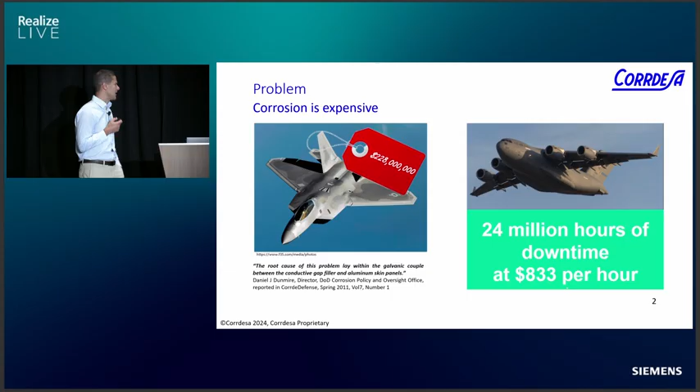Corrosion is definitely complex. It's really, really complex because we have so many different mechanisms here. We have galvanic corrosion, of course. We have pitting corrosion, we have crevice, we have so many different mechanisms. And the reason for the complexity is not only the different mechanisms, but also the different things that are actually taking place while we have corrosion.

But just because of the complexity of the problem, we should not stay away from modeling, because there are other areas like turbulence, for example, combustion, chemical reaction, that are as complex as corrosion, but we are seeing that folks are making really good progress in those areas. But we at Corrdesa still see that corrosion is in the Stone Age.

So we have really fast computers, we have really efficient numerical methods, but still we don't see the community embracing CFD applications, or not even CFD, applications that we have developed to mitigate corrosion risk. And more importantly, 80% of all these problems are related to galvanic corrosion. So if we focus on that 80%, we're going to make a really, really positive impact in the industry. Not only in the industry, but of course in other areas as well.

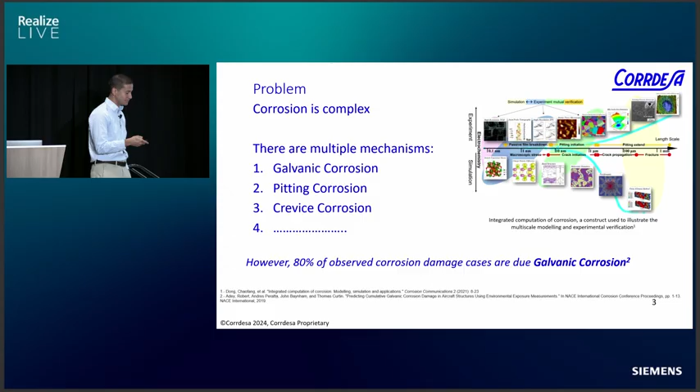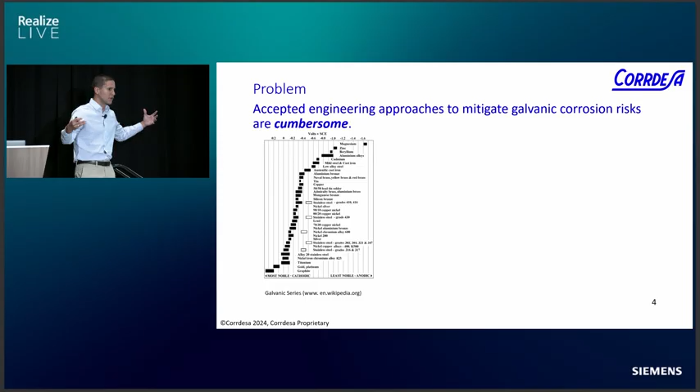So, just to make the example here, these two materials will definitely show lower corrosion than, for example, zinc and copper over here, because they are really far apart from each other. But you can really see that this becomes really complicated once you start working with complex systems, with multiple materials, multiple pairs, and all of that.

The MIL standard is what the DoD is now using. They said now it is time for us to use a standard so that everybody, OEMs, can use a common ground. And this is really simple to use. A table, as we see here, we have this column over here with some materials, and another column here that actually represents the same materials. So for example, 11 is 11 over here.

So if we want to determine the corrosion rate between steel and this stainless steel over here, it is basically just about drawing a line from 11 and intercepting that with 30. And that basically says that the corrosion risk is number 3, and that says that we are going to have a corrosion rate between 1 and 5 mils per year.

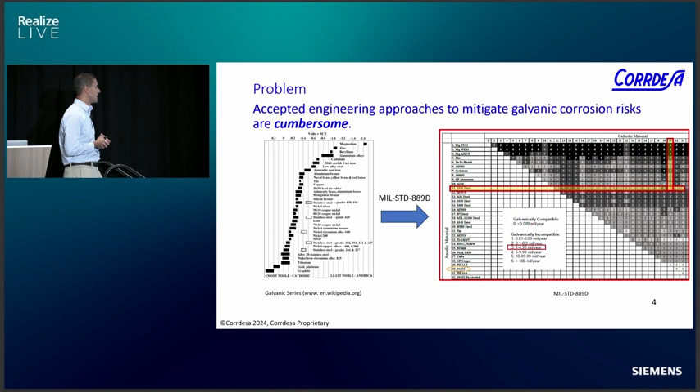This is a method that is now used in the DoD, the Department of Defense is using that, but it has a main limitation. And the limitation is that we have to use this with 1-to-1 anode cathode ratio. Once we change the anode cathode ratio, this doesn't work anymore. We cannot use that anymore. And it's clear that actual systems don't have that 1-to-1 anode cathode ratio.

Another issue is that, imagine now you have multiple materials, and now you have to start keeping track of the combination or the interaction of this material with the one at the bottom, the fastener with this one, the fastener with the other one. And you can quickly see that that becomes really, really complicated, really cumbersome.

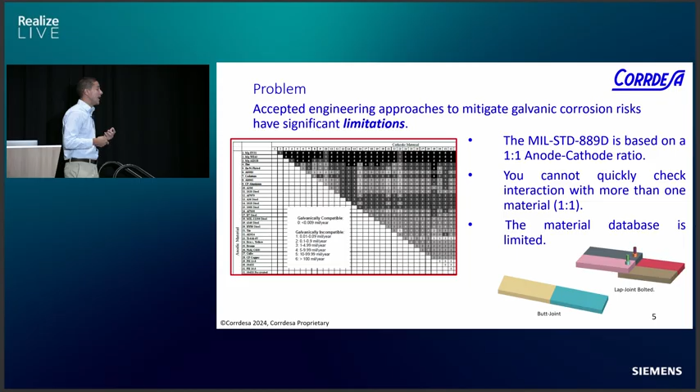And of course, the material database is limited. And most of the time, companies like Northrop Grumman, General Dynamics, you name it, Lockheed Martin, they develop their own recipes, their own material, and they want to know what is the electrochemical signal of their material so that they can understand their system better.

Because of that, at Corrdesa we developed, I think it was 7 years ago, our product called Corrosion Djinn. And Corrosion Djinn is not only a software that provides you information about the corrosion rate, it is also a database management system, which means that Lockheed Martin can say, hey, I need you to add this material that I created for this system in my database. Okay, perfect. Give us the material, we run the test, and we're going to update the database for you.

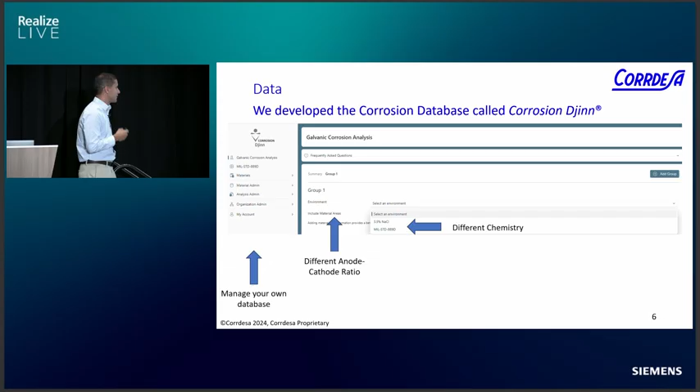Another important feature that we have in this version of Corrosion Djinn is that now we can work with different anode cathode ratio, which is extremely important. You will see that shortly. And now we are working on another feature that considers the different film thickness, so we can see the role that the thickness plays in the corrosion rate. Thinner thickness, of course, increases the corrosion rate, and thicker film thickness basically reduces the corrosion rate. And also we have different chemistries here. We have, of course, the one from MIL standard and the 3.5% sodium chloride.

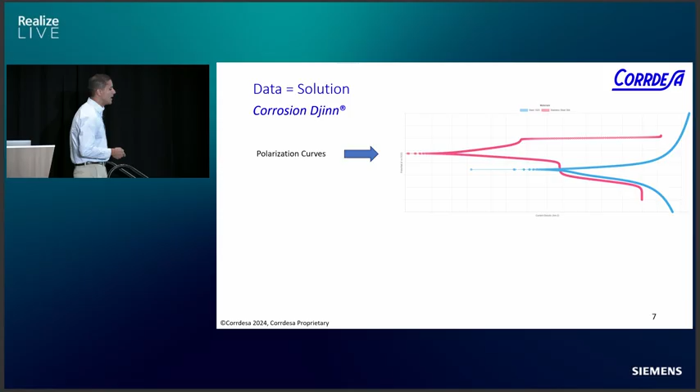So from Corrosion Djinn, once we run this, which takes a few seconds, it's actually really fast, we have information that is important for our electrochemical team. We have OCP, we have self-corrosion rate, we have all that information. But more importantly, we see that we get the same MIL standard rating. In this case, it's number 3, and if I quickly go back, you can see that that was exactly the same number we have here. We use the same procedure in the back end called mixed potential.

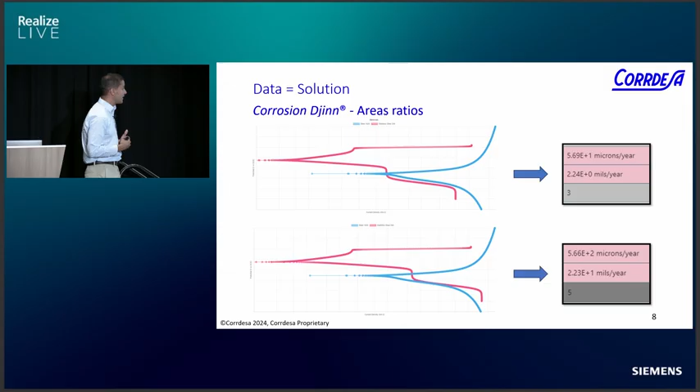In this slide, we see the role of the anode cathode ratio. Anode cathode ratio 1, again, 3, and we have somewhere around 2.2 mils per year. And by increasing the anode cathode ratio, we now have 5. This is not captured by the MIL standard. Even though we use the same mixed potential, the same physics in the back end, the standard doesn't capture that, whereas Corrosion Djinn does.

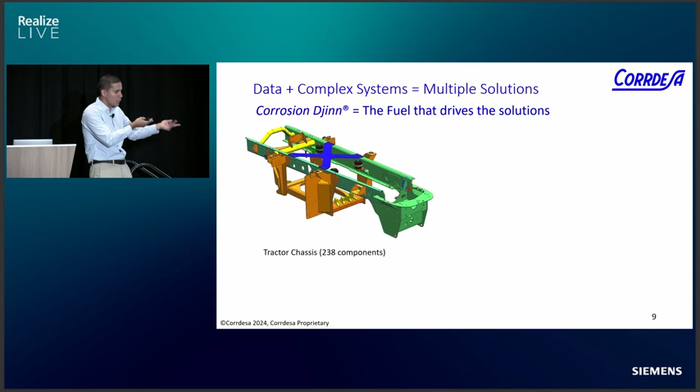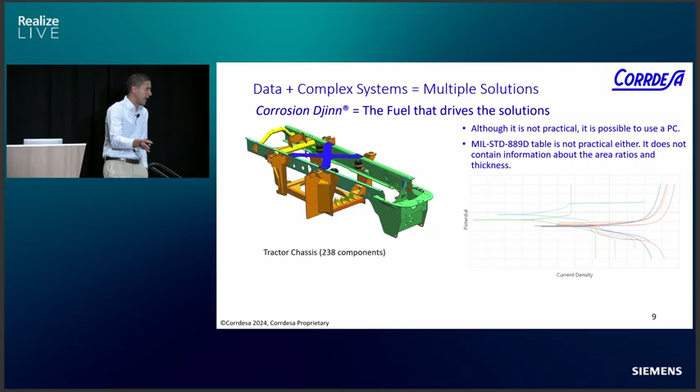The question is, how can we use that for real systems? Because for one-to-one anode cathode ratio, or even for different anode cathode ratio, we have a solution. But for real systems, it is evident that using polarization curves is way too complicated, because now we have to see the interaction between this curve and all of them. And this is actually what we used to do in the past. Using the MIL standard is pretty much impossible, because I just demonstrated that the anode cathode ratio is important.

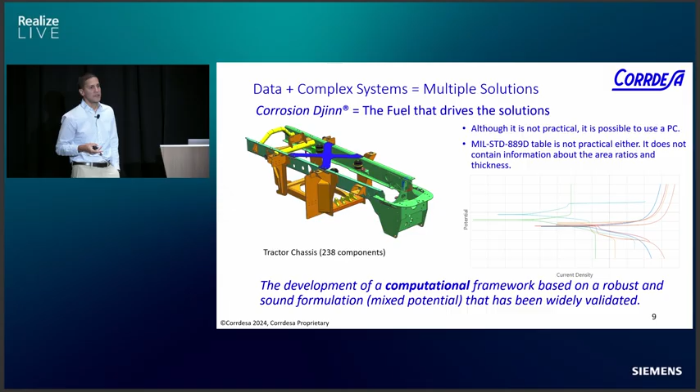That's the reason why we focused on the development of computational frameworks based on a robust and sound formulation, which is the mixed potential, that has been widely validated. And that's really important. Our database has been widely validated, and it's exactly the same procedure that the MIL standard uses.

That is why we said, okay, if we understand that data is important, no matter where we use it, how can we leverage that in different stages of the engineering process, starting from the far left all the way to the far right? Remember, now this is mandatory, MIL standard. And what is even more important, this standard over here, the 1568, says that modeling and tests shall be used. And that is important because if other areas of engineering are using modeling for certification, like FAA is actually considering CFD for certification, why is the corrosion space still using tables and Excel sheets? That doesn't really make sense.

That's the reason why we said, okay, let's just make our very best to use the data that is accurate to resolve complex systems, and let's just create multiple solutions. Because we don't believe that one size fits all. We don't believe in that. Again, at early stage of the project, we can use it for conceptualization tasks, for example. We can definitely use Corrosion Djinn, no problem. Well, we know we are going to have this component, it has this material, we have this anode cathode area ratio. Okay, corrosion rate will be somewhere around here. That's perfectly fine. We can work with that.

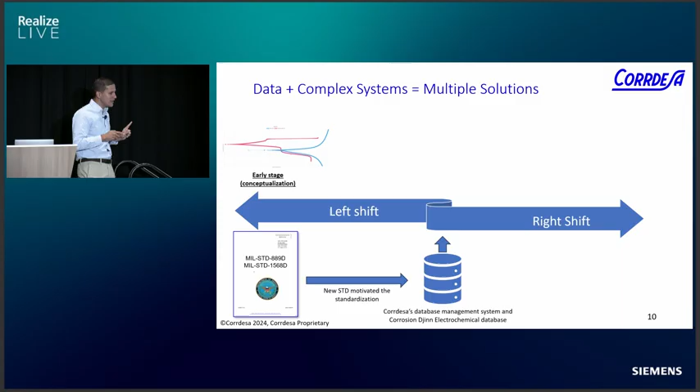It will definitely help to avoid problems that we see in the C-17 and, I think that was the F-35. I usually confuse the F-22 with the F-35. But it's clear that now we have a tool that we can use. Okay, but systems are complex. Well, no problem, we got you. Siemens and Corrdesa, we joined efforts together and we pushed our database into NX. Now that solution is integrated in NX. And you will see shortly how a simple click will basically interrogate the entire CAD, and it will tell you, hey, watch out, you're going to have an issue here. Hey, you are good here, go ahead.

And this is important because what usually happens is we can start resolving galvanic issues here. Remember, 80% of the problems are galvanic corrosion. So if we can start resolving problems once the engineering team has defined different sections or has locked in a few aspects of the design, we can actually bring all these here, and we're going to help the engineering project in a really positive way.

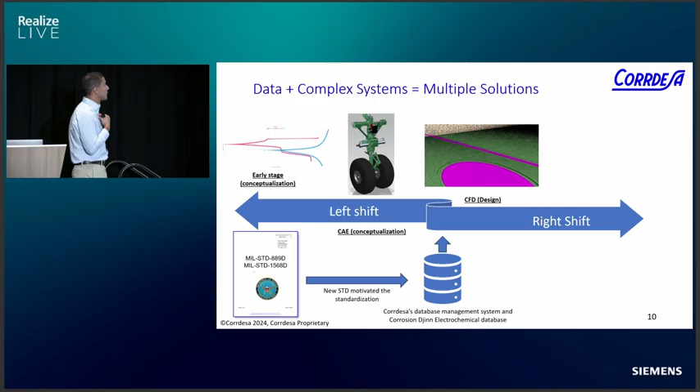The other way, the one I enjoy the most, is CFD, because I'm a CFD guy. Here I want to quickly mention a few important aspects of the CFD workflow. Most of the time, when we think about CFD, we think about turbulence and combustion and multi-phase flows, all of that. And one thing that I particularly like about the solution is that the equation we are solving is the Laplacian of the potential field, which has an analytical solution. So we don't solve the flow, we don't use either SIMPLE or PISO or any of these algorithms. We just solve the Laplacian of the potential field, which means that even though the mesh seems really fine, because we had to refine the mesh for multiple reasons, it's really fast. You can run these problems really, really fast.

And on top of that, remember, garbage in, garbage out. Well, assuming that we reduce the numerical errors because of the mesh, the procedure, the solver, all of that, if I use a boundary condition that is exact by nature, it means that at least my solution will be exact, assuming that my numerical error is really low. And that's something that we believe we are providing to our customers, because we're using this boundary condition in my CFD. And theoretically speaking, this has an exact analytical solution. Anyway, coming back to this.

Sustainment. Once we do our very best resolving all the problems here, and even over here, we still have folks that are dealing with things that were designed and developed 50, 60 years ago, and they need to resolve their problems. And we cannot say, oh, you know what, we can't, because we just focus on the design. No, we can. And actually, we do. One of our main customers is the Air Force, and, again thanks to Siemens and our partnership, we developed something that we call the Corrosion Toolset that you are going to see in a minute.

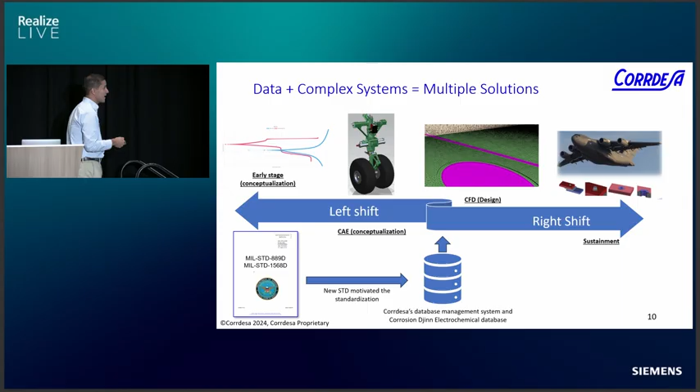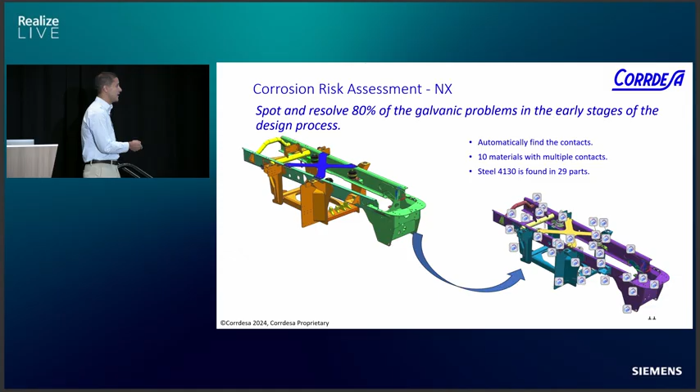So in summary, we use the same data for all these different types of solutions. Of course, this takes seconds, minutes, days and weeks, as you will see. This is a quick demo I'm going to share with you next. Again, we see the same section here. Now, after bringing that into NX, the mindset here is, let's just focus on those complex sections. Let me just define those areas where we have high corrosion risk, and let's try to resolve them in NX. Here we have, for example, 29 parts with 4130. So imagine doing this with the table or the polarization curve. That would be too much work. Look here, so this is NX.

I'm pretty sure you all are familiar with this. Now the feature is actually in the production version of NX. I brought the part. I will select the whole thing because I want to check my corrosion risk, 238. Click. It's actually going through all the body pairs. We have all my body pairs here.

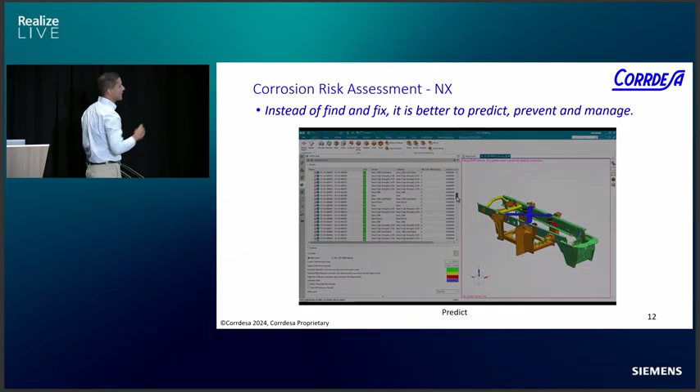But remember, we have to go to the face pairs because one body can have multiple face pairs or interact with multiple materials. That's what I'm doing here. And I have my galvanic corrosion. And now I see what is green, then yellow and red. As simple as that. We basically reduce weeks or days of work to seconds. And of course, I cut a few sections of the video, but that didn't take more than a minute.

So the idea here is, let's be proactive. It is not enough to say, oh, we have corrosion, to predict. No, we have to predict, mitigate, prevent, of course, and manage. Now let's solve the problem. Let me, for example, solve that section over here where we see that we have a corrosion rate somewhere around 230. That's aluminum 6013. And I'm changing that to aluminum 2024 because I have to be consistent.

Yeah, I had aluminum at the beginning. Let me just change that aluminum for a different series. In this case, it's 2024. And what you're going to see is that now I resolve my issue. The corrosion risk was 4, now it's 2. We solved the problem.

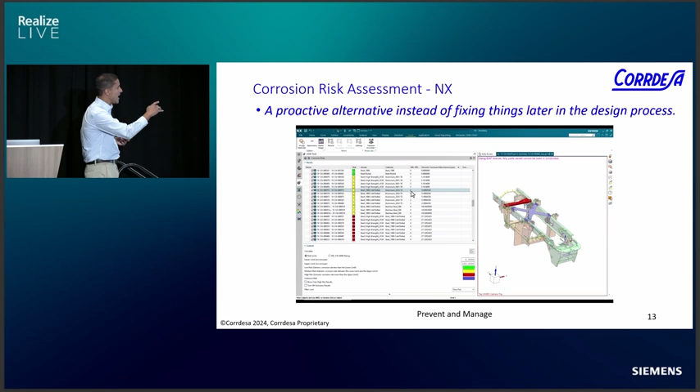So what if we use this way early in the process and we leave those really complicated parts or those complicated subsystems to the experts? Because definitely this doesn't mean that we are not going to have issues with corrosion. This means that we can solve a lot of the problems that are difficult to track once you have this complex system. Remember, we have teams of people working on multiple different areas, and most of these issues are actually picked up really late in the process, and at the end it's just too late.

You have to work with coatings and all of that. So the idea is, okay, let's start with good material selections from the get-go. Now you're going to see how CFD complements the tool set here. Again, so we have this component. Initially, we just analyzed the interaction between this piece over here and this piece over here. This is cold rolled, and this is aluminum, or it was aluminum 6013.

Again, this is the corrosion rate we had at the beginning, 230. And as the previous video showed, we reduced that from 4 to 2. Good. My boss is happy, everybody's happy. However, we quickly see that this part actually interacts with this one over here, with another one over here, and another bracket over here. So this system has 4 different parts.

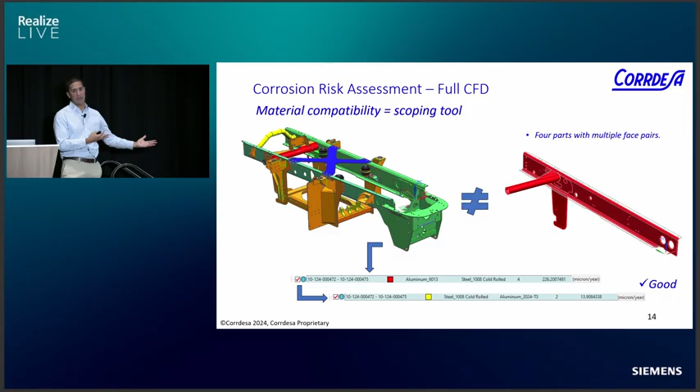If I do the same analysis of this component in CFD, we're going to see a totally different story here. Remember, NX is just, again, 1-to-1, but it considers different anode-cathode ratios. But still, it doesn't take into consideration the gradients that we have here due to the different electrochemical signals. And gradients are important. Look what happened. The story is totally different.

Now, after running my CFD, the same boundary conditions, the same conditions for the electrolyte thickness and all of that, I didn't change anything, we see that for the aluminum 6013, the corrosion rate is actually 2,000 microns per year, whereas NX told me, hey, it's 230. That's perfectly fine. We know that the scopes of these two technologies are different. And also, I'm seeing a corrosion rate on the 4130 over here, which NX, of course, tells me the same thing. We're using the same data.

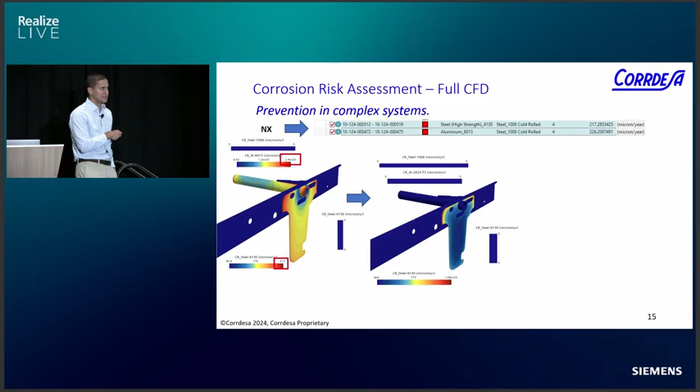Okay, let's just resolve this problem. Because I know that NX doesn't have the capability to analyze these multiple different materials. It doesn't. Okay, let me repeat the same procedure I did in the second video with CFD. I change from 6013 to 2024, boom, no corrosion rate. And that's even better, because it was 2, now I see that my corrosion risk is pretty much 0. Perfect. But now I have another problem.

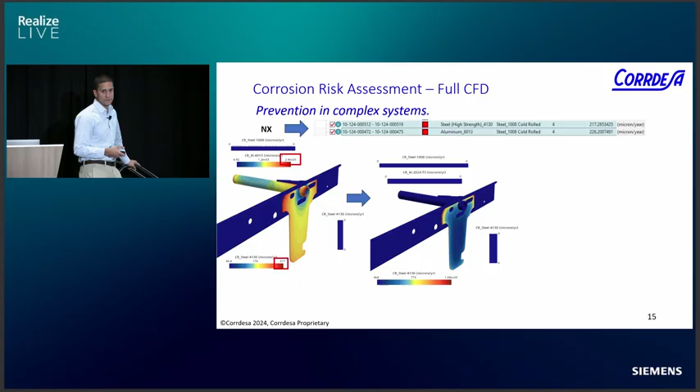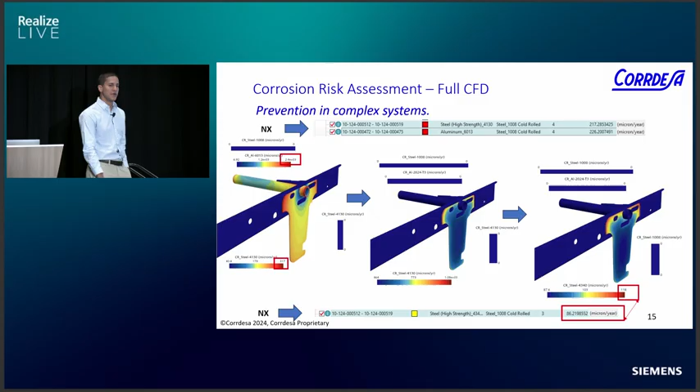This was 200 microns per year, and now it increased to 1,000. That's perfectly fine because I changed the system. Now my system converged to a totally different equilibrium point. But that doesn't mean I cannot resolve that. Of course I can. And that's what we do here. Now that I have the information of my entire system, let me just see what happens if I change the material of this component over here.

It was 4130, and I have to be consistent because I don't want somebody from the mechanical team to call me: Julio, why did you change from 4130 to aluminum? That doesn't make sense. Okay, let me just change that to 4340, which has similar mechanical properties.

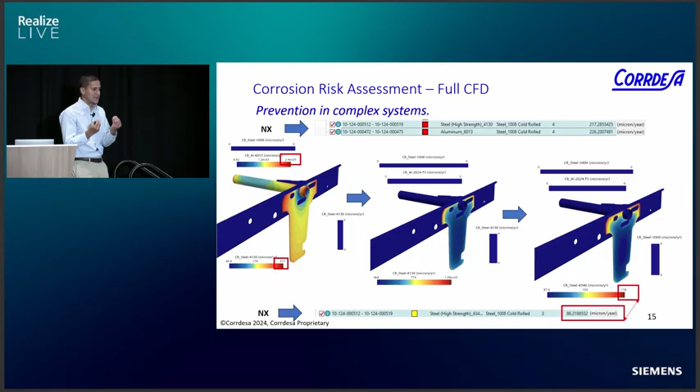And what we see here is that we reduce the corrosion rate of this component from 1,000 microns per year to 178 microns per year. If I do the same process in NX, changing from this material to this material, of course NX only takes into consideration the interaction between these two. It reduces to 86, which is great. It's definitely great. The point I want to make here is that we have to use the right tool at the right point of the engineering project.

This is a quick recap, because now we're switching gears to the Corrosion Toolset developed in Teamcenter. But here I just wanted to revisit a few important thoughts from the presentation. So anode-cathode ratio is important. Corrosion Gene considers that; NX will actually have that capability in 2604, but it is not in the production version yet. But it's important to understand that NX is really good at ranking and finding the hotspots and focusing on the hotspots. It's really efficient for that.

And when we have multiple materials and different phase pairs, let's resolve that explicitly using CFD. NX takes seconds, and CFD, we all know, takes hours, days, and you need to be an expert on meshing, pre-processing, all of that. And more importantly, let's resolve those issues early in the design process. That is really important. That is exactly what we hear from our customers: I wish I had this 4 or 5 years ago. I wish we knew this before. Well, now you have the tool. Now you simply have to get the license, and you can start using this.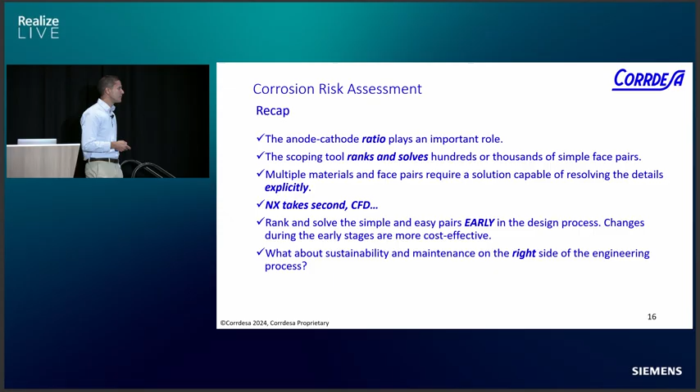What about sustainability and maintenance, on the right side of the engineering process? Well, we developed something that we call the Corrosion Toolset, because we believe that democratization of CFD tools is important for the corrosion space. Most of the time, corrosion experts are not CFD experts, and most of the time they have no idea what CFD even means. So with that in mind, Siemens and Corrdesa developed a set of templates. And we see here the templates that we have developed so far. M&P, operations, sustainment, maintenance can highly take advantage of this.

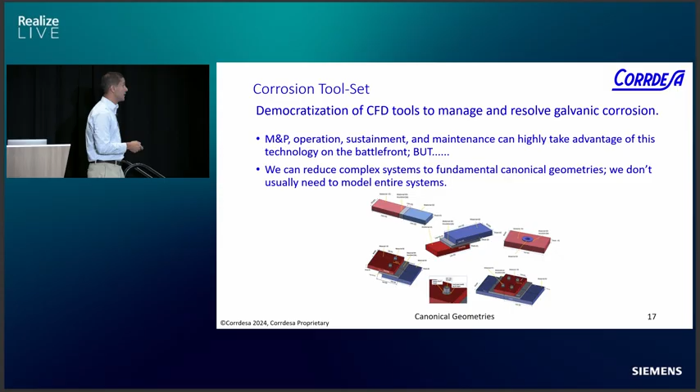Incredible. But we understand that you need expertise in CFD. And that is the reason why we said, okay, don't worry, we got you. We're going to make everything easy for you. We're going to script everything so that you just select a few simple things like geometry, thicknesses, and boom, you're going to have your CFD solution. And we reduce the complexity of systems using canonical geometries. This one is the C17 fuel access door, and you're going to see why canonicals are important.

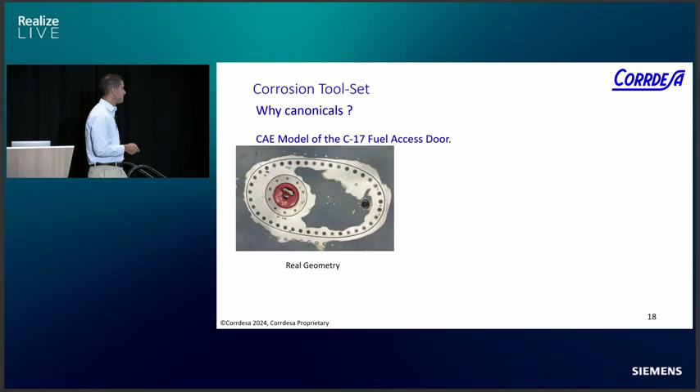We agree that you can represent different types of complex systems in these different templates we have created. For example, over here we have fasteners, and of course now we have the interaction between this piece and this piece. So we can see that this is a butt joint, and then I have a fastener with a lap joint bolted connection, and based on that we developed our library. So this is my computational representation of this piece, the same CAD, and this is what we call model 2, which resolves the interaction between these two, and model 1, which resolves the interaction between this whole piece and this piece over here.

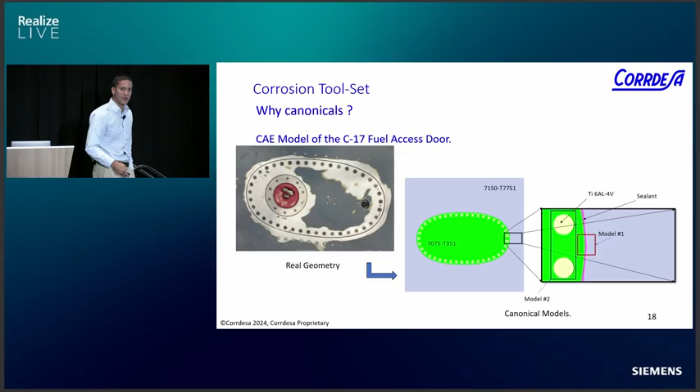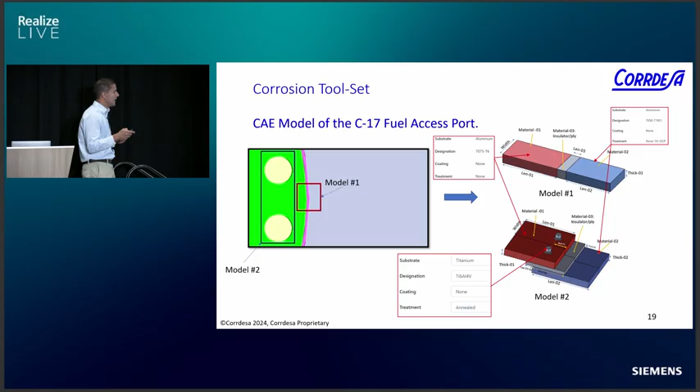Of course, the reason behind the canonicals is, again, the type of equations we are solving, which, numerically speaking, are elliptic, and because of that we can make these assumptions. After using our templates, we assign the materials, dimensions, all of that inside Teamcenter. You will see that shortly. And we just click the button and run. Look at this. If our assumption is right, then the corrosion rate I obtain from a full-blown 3D CFD simulation should be similar to the one I get from my templates. And that's exactly what this picture shows.

We see that the maximum corrosion rate on my aluminum 7075, which is this one over here, is somewhere around 300 microns per year. But my template, which is just a simplification of my model, predicts a corrosion rate of 320. It's absolutely amazing. And this took me more than a week. Pre-processing, meshing, blah, blah, blah. More than a week. And this takes 1 minute. This is just amazing. That's the reason why folks at the Air Force are so interested in deploying this solution pretty much nationwide.

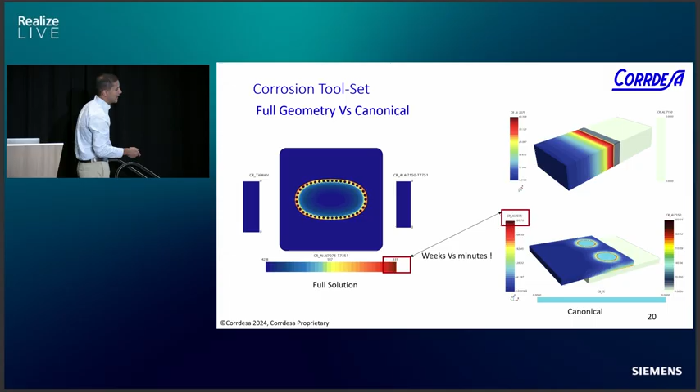Here, with this template, I'm interested to see the interaction between the 7075 and the 7150, and that's what we have here. And again, the corrosion rate is somewhere around 40. If I'm not mistaken, I can see that clearly here, somewhere around 40. But again, we know because of the galvanic series and all of that, that the important issue here is the titanium, the interaction between the titanium and the aluminum.

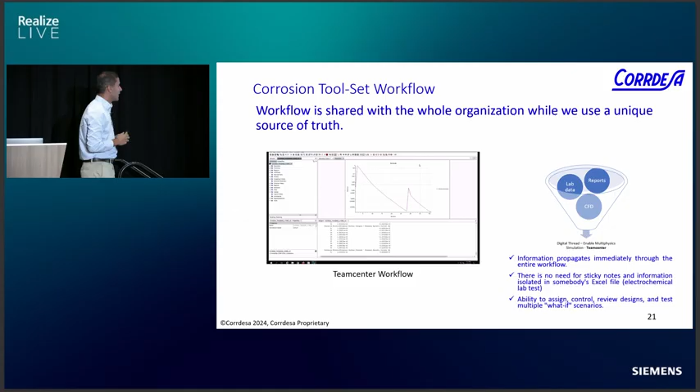We are selecting here the environment, polarization curves over here. I just check a few things. I'm exporting that, and I'm selecting the other group. When I export that, Teamcenter takes care of everything for me. It moves the polarization curve to the scratch directory, and these are the templates I just mentioned. The user only requires to define the dimensions, because Teamcenter, like I say, just manages the workflow, data management, and all of that, and this takes no more than 5 minutes.

One important thing that we and our clients like is that, imagine, for example, you have your own database or your own material, you bring that to Corrosion Gene, Teamcenter manages everything, and that information propagates throughout the entire organization. You can have access almost in real time. There's no need for sticky notes. That's basically what I call, do you have this polarization curve? Or do you have this electrochemical property? Everything is in Teamcenter. Everything is managed by Teamcenter. And we have the ability to try and test multiple what-if scenarios.

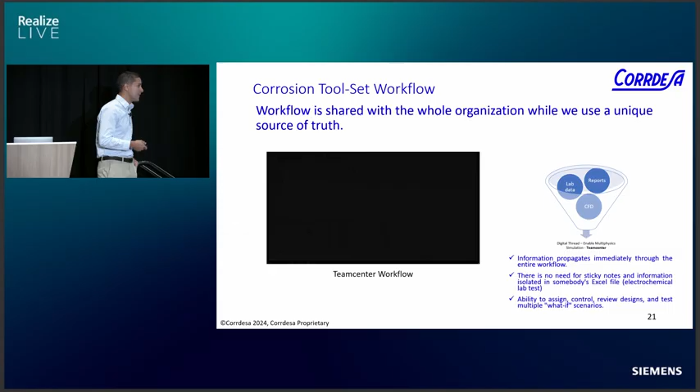And one important thing is that if you need a specific template, we can develop that for you. And that's another interesting relationship we are building with Siemens, that we can develop tailored solutions for our customers. One of them is Northrop Grumman, that we recently worked together with because they were interested in some specific geometries for their own application. Yes, we can definitely do that for you. Oh, we need new material in our database. Yes, we can definitely do that for you. And that's thanks to the really good relationship Corrdesa has with Siemens.

Conclusion, I definitely like to use this example of a toolbox. As I mentioned, we cannot resolve everything with the hammer, even though it looks easy that you can just use the hammer for everything. But definitely we need to use specific tools for specific types of solutions. All tools are essential. Okay, so we see STAR-CCM+ somewhere here. Teamcenter, of course, is my toolbox, and my Corrosion Djinn data is somewhere here, and NX is somewhere here. You need a new tool, like Hex, for example? Oh yeah, call us. We will develop that specific template for you.

We are witnessing, that's something I like to repeat, we are witnessing the creation of a new computational discipline that we like to call computational corrosion analysis. And we feel very proud of the work we are doing and how we are helping our customers. This toolbox is cost effective because, again, NX is really fast, license costs are different, time, expertise, all of that. And just grab your toolbox and start tightening those loose fasteners early in the process. Basically, that's NX. You have your CAD, start working at the CAD level way before it's in the manufacturing line. And just leave those difficult problems for the experts.

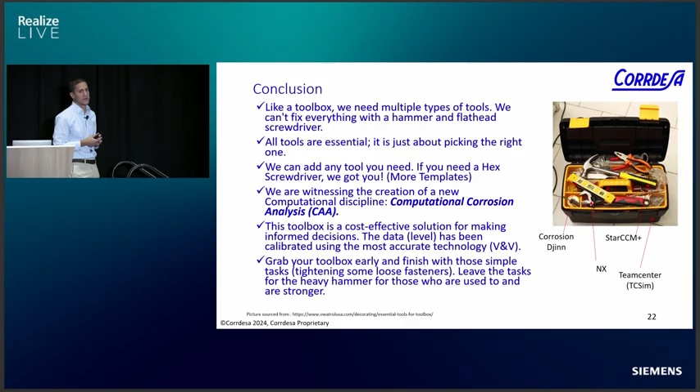So it's important to acknowledge the contribution from the Siemens folks. I'm sure that I'm missing some names. We have been working together for pretty much 3 years. And it is important to thank and acknowledge the contribution of our customer at the Air Force, Dave Pett and Monali Patel. So thank you very much.

If you have questions, cool.

Yes, please. So let's say I was with the Air Force and I'm flying or maintaining a C-17 in the Indian Ocean, and I'm flying to Guam, and I go to Hawaii, but I just repeat that same loop over and over and over, and I'm in a different environmental condition. What do we do? Yes, Bill, that's a great question. And I'm glad you brought that up.

I'm sure you are aware of D2P2. So we are currently working on that, and I appreciate you brought that up because I missed that part in the presentation. We're currently working on a project we call D2P2. We plan to deploy this for the Air Force Launchpad, and currently we're working on something called environmental severity indexes. And we are developing a new statistical method that will leverage APIs from weather data. We're going to bring that inside STAR-CCM+ and take that into consideration to understand what happened under that scenario.